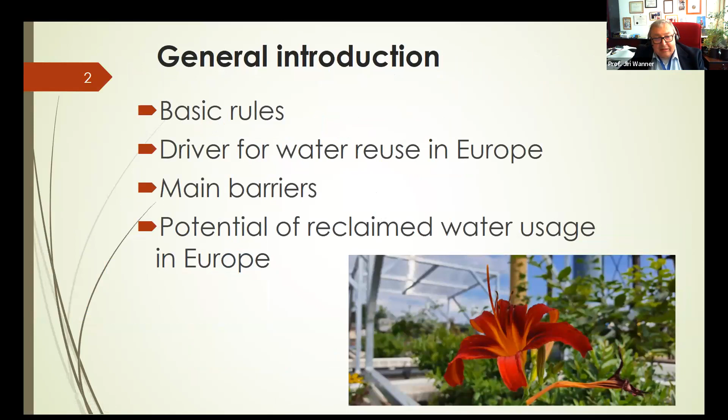My presentation is divided into two parts. In the first part, I will give you some general introduction about water reuse in Europe, the conditions and barriers, etc. In the second part, we will speak in more detail about the legal regulations in the EU. So water reuse can be ruled by two basic principles.

We are preparing the reclaimed water with certain quality, tailored according to the purpose. In all cases, the water reuse project must be safe for human health and for the environment. This is a very important condition, otherwise the idea of water reuse could be very quickly spoiled.

To fulfill these basic rules, the reclaimed water must meet some quality requirements. To have standardized quality requirements, we need joint standards. In the EU countries, we can see three different types. We have some countries which already have their own national standards for reclaimed water quality.

Those countries are especially from the Mediterranean area. Then, since today, we will be using the EU regulation number 741 from 2020. And then we have a very important set of ISO technical standards about reclaimed water quality.

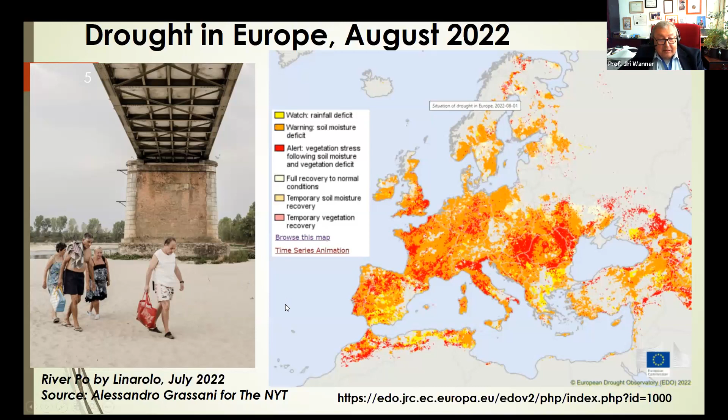Of course, on the other hand, there are some barriers for water reuse. Concerning the European Union, the main barriers are connected with low experience with water reuse in most EU countries, because not all EU countries were using, or are already using, reclaimed water, and they are now learning this new water resource, how to use it.

With this is connected the lack of experience also in identifying and optimizing the appropriate treatment technology, and unfortunately also the economy of the process. So we still have to learn how to develop very efficient business models for water reuse schemes.

All these barriers are connected with three major factors: the safety of reused water, which must always be guaranteed; the economy, which must be more beneficial and suitable than the use of tap water; and finally, not all people in the European Union are still accepting the use of reclaimed water instead of drinking water.

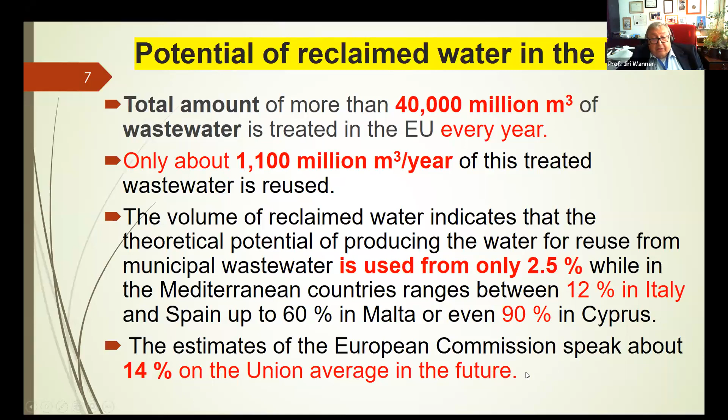The estimates of the European Commission are that we can reach at least 14% on the European average by applying this regulation. Water reuse must meet certain conditions, and these conditions are defined in the legislation.

I will mention in this part of the presentation how the regulation, which is today starting to be applied, was created, and we will mention also some auxiliary documents which were published by the EU, and finally we will discuss some possible reasons for the fact that some of the EU countries didn't accept the regulation into the national water legislation.

So what was the way of the European Union to water reuse legislation? I think it started in 2012 with this material. The main purpose was to consider all the ways how to guarantee water resources in Europe. The Commission for the first time published the idea that water reuse can be accepted as a solution with lower environmental impact than other alternative water resources, and promised to prepare an EU-wide legal instrument to control this area.

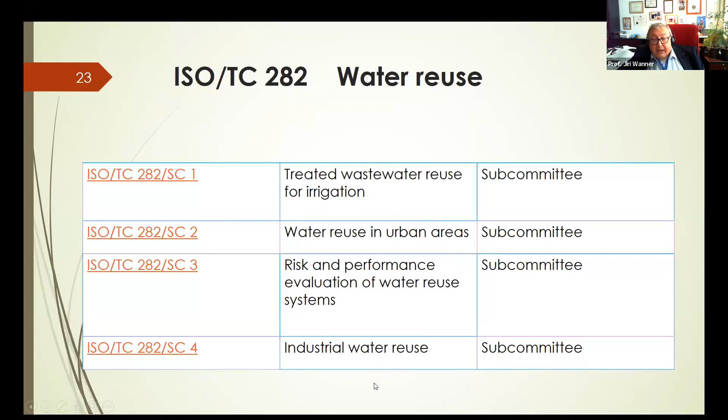We should also mention that the institution of water reuse has got support from the new proposal of the revised Urban Wastewater Treatment Directive of the European Commission, because article 15, paragraph 1 of this proposal says that member states shall systematically promote reuse of treated wastewater from all urban wastewater treatment plants. So this is very important support from this new directive.

We are now on 26th of June, when regulation 741 can be applied, and the individual member states have 3 options. They could either accept the regulation, or refuse the use of the regulation, or decide about the application only in some areas of the country.

We still do not know the final outcome of this procedure, but from the map presented earlier this month at the meeting of EU water directors, we can see that the European Union, in relation to this regulation, has divided into about 2 halves. The western part of Europe mostly accepted or adopted the regulation into the national water law system, and the eastern part mostly refused to apply the regulation.

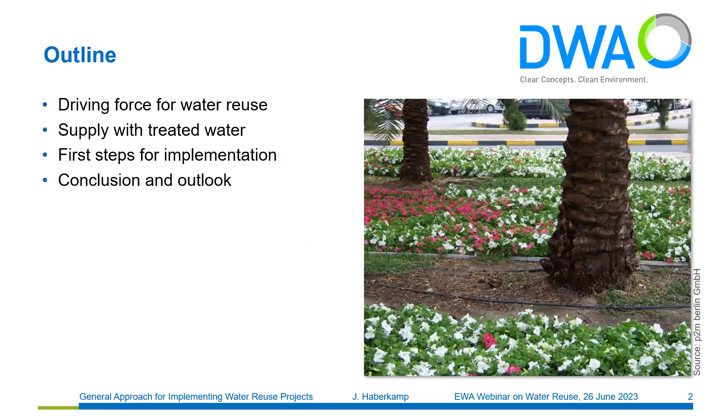As Professor Wanner already said, water reuse will not solve all our water problems, but water reuse or treated water may be a substitute for precious fresh water, so that the competition for freshwater resources may be reduced by water reuse.

In terms of the driving force, the lack of water, and you may also add the price of water, which is often connected to the lack of water, there are some general rules. First of all, the higher the lack of water, the higher is also the willingness of potential users to carry additional costs. So for instance, the farmers to carry costs for additional treatment and distribution of treated water. This, of course, has to consider the alternative. If the alternative is crop loss and therefore a high economic deficit, this has to be taken into account when drawing such a balance.

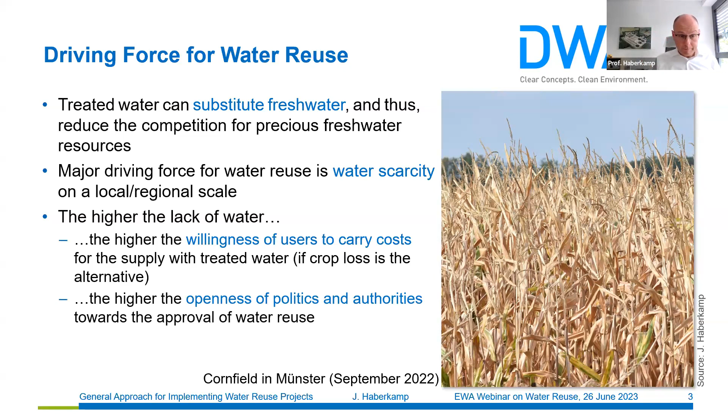The openness of politics and also public authorities increases with increasing lack of water. That's also an issue that we are just observing in Germany. And finally, public acceptance plays a very important role in terms of water reuse. We have already seen in a lot of regions all over the world that public acceptance strongly increases with increasing lack of water.

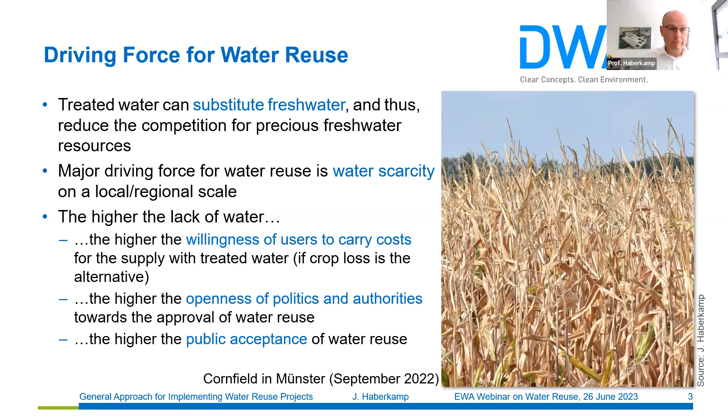In terms of the supply of the treated water, the distance between the wastewater treatment plant or water treatment plant on the one hand and the areas of use on the other hand are of crucial importance in terms of costs. On the one hand, capital costs have to be borne for the implementation of distribution networks and also maybe storage tanks, but storage tanks are not necessarily connected to the distance. On the other hand, the operational costs for pumping the treated water also increase with increasing distance from the treatment plant.

The catchment of a wastewater treatment plant has to be very carefully taken into account in terms of water reuse, because some dischargers, such as certain industries or larger hospitals, may discharge wastewater containing increased concentrations of, for instance, organic micropollutants or heavy metals. These water constituents may require additional treatment in order to reduce the risk regarding the application of treated water, and this additional treatment, of course, also increases the costs, and may even make such a reuse project impossible.

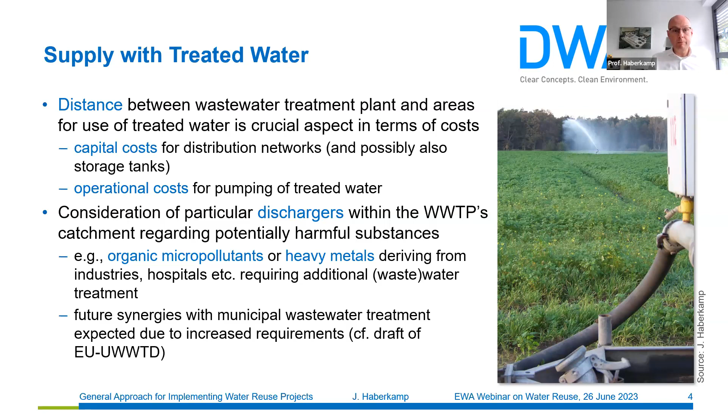So if on an individual site or on a local scale, water scarcity is a fact, and there is a certain demand or high demand of potential users, the very first step of the implementation is the analysis of the entire water reuse scheme, the entire system. You have to start with the catchment of the wastewater treatment plant, and you have to have a very close look at the existing wastewater treatment process. Together, the quality of the raw wastewater and the existing wastewater treatment process is decisive in terms of the current quality of the secondary effluent.

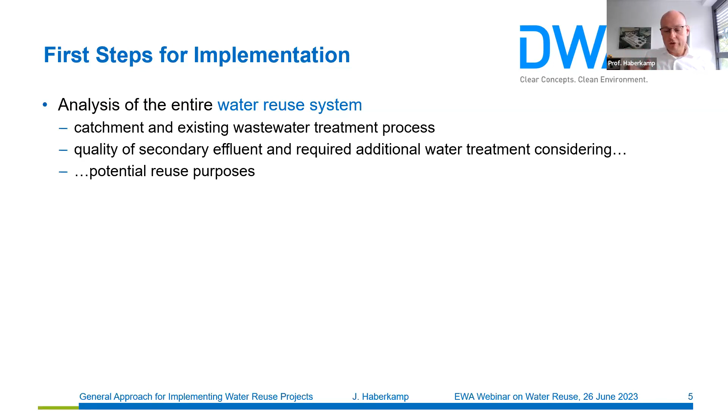And of course, additional water treatment is required. The degree to which the secondary effluent has to be further treated depends on the potential reuse purposes. As Professor Wanner already said, there are four quality classes which are connected to the purpose of reuse.

And all this is overseen by the competent authority, the authority that is responsible for giving the permit, which also has to be included in the process from a very early point.

Then, as Professor Wanner already said, the preparation of a risk management plan is obligatory regarding the EU regulation. This risk management plan has to be prepared under the responsibility of the operator of the water reclamation facility, with the involvement of all stakeholders involved.

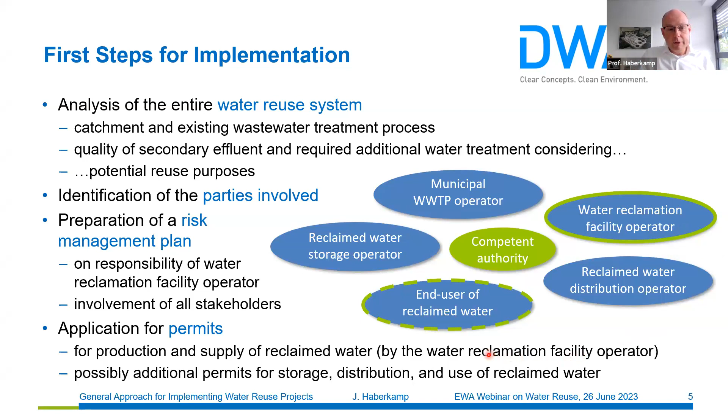There is at least one permit that has to be applied for: the permit for the production of reclaimed water, which has to be applied for by the operator of the water reclamation facility. There may be additional permits, for instance for storage, distribution, and use of the reclaimed water. For instance, in Germany, it's quite probable that a further permit will be required, to be applied for by the end user of the reclaimed water.

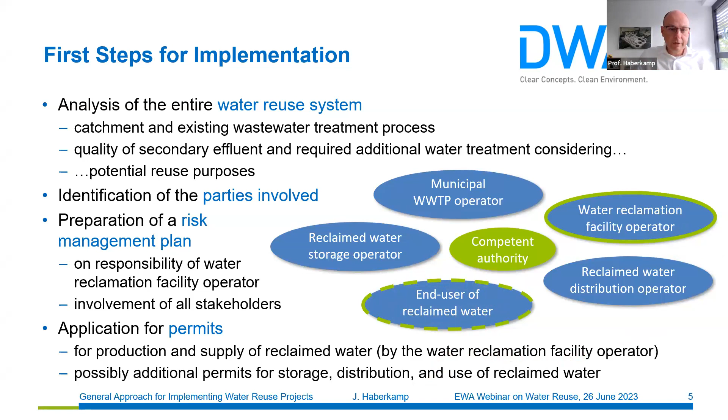So let me just briefly conclude. I guess we all agree now that climate change is very likely to increase droughts, as we see now in Central Europe. And the requirements for water reuse are not trivial at all, but with good cause. Water reuse is connected with certain risks, and it is very important to address these risks and minimize them.

These requirements are accomplishable if the driving force is strong enough and if the will of all parties involved to implement such a reuse system is high enough.

The preparation of a risk management plan is quite a new challenge in the water sector, but it's not only a specific issue regarding water reuse. It is now also required in drinking water supply, and it will be required in the future in wastewater treatment and discharge. As I said, there will be some synergies with the future European wastewater treatment directive.

And therefore, I'm quite sure that water reuse will contribute to the conservation of precious freshwater resources, which can then be used for other purposes, so that reusing treated effluent or treated water for brewing beer may be just a funny exception in the future. So with this, I thank you for your attention, and I give back to Jiří.

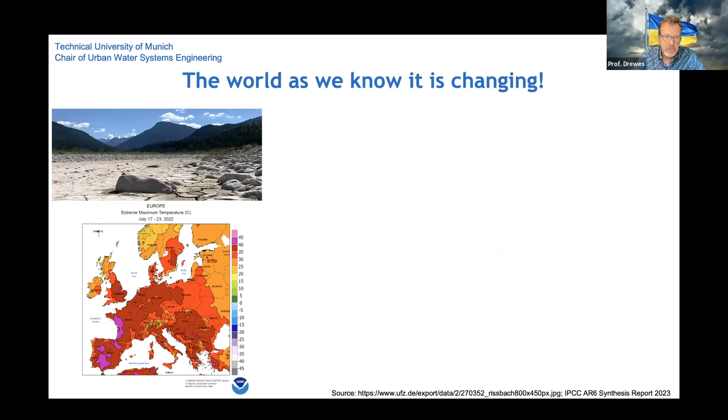So do we really need it? I think it's more a question of awareness and willingness to adopt. I want to briefly mention, as the previous speakers already did, when you reflect on the last 5 years, 4 of them, 2018, 19, 2020, and 2022, already had major impacts with respect to extended droughts in Southern Europe, but also in Central Europe. So things are changing dramatically, and the world as we know it is changing, with significant implications.

Even if we meet the Paris Agreement on a global scale with 1.5 degrees temperature change, or not to exceed this 1.5 goal, people who are born today or are young professionals will live in a very different world in the future, not to speak of if we don't meet this target.

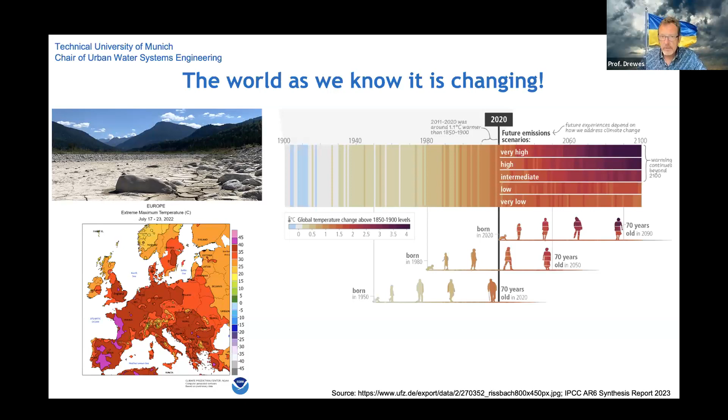So the extreme events we're experiencing already will come with significant challenges to the water sector. This primarily results in declining supplies, a very different precipitation pattern, and extreme events, too much and too little over extended time periods. And with that comes growing uncertainty for planning and operation, which calls for new, more flexible approaches to cope with these challenges.

And of course, also an increasing demand in sectors that have not really utilized, for instance, water for irrigation an awful lot. That certainly is true for Central Europe, when we think of the agricultural sector, but also for urban green, as mentioned before, or vegetation in general will need more water to survive.

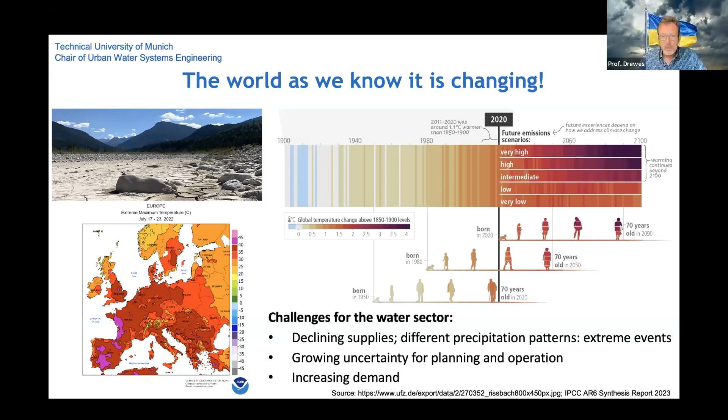So there's certainly a need to diversify supply options, recognizing the increasing demand in agriculture, urban landscape irrigation, securing public water supply, but also maintaining ecological base flows. We can ask the question, do we always need to deliver drinking water quality for these purposes? Or can we go to a more tailored approach that would meet a water quality appropriate for the intended use? And that brings us to water reuse.

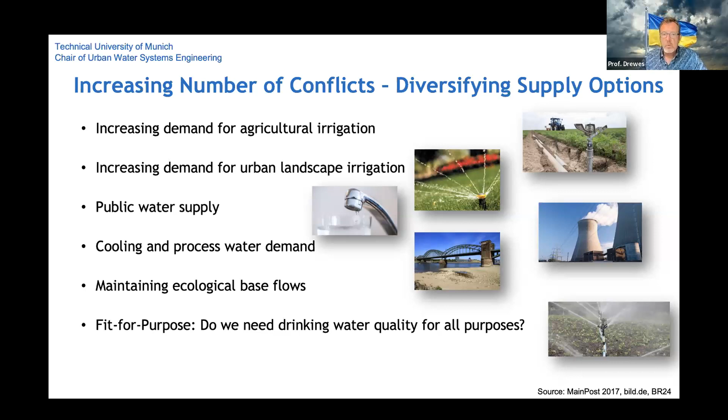So indeed, I do see a tremendous opportunity to at least provide the option for water reuse, even in countries that have not experienced it in the past. The map Professor Wanner showed is interesting, because even countries who opted out at the moment will fall into this category and have to cope with these challenges. Of course, it's not intended that we do water reuse nationwide—it's always a local issue, a local shortage in many countries where water reuse could play a role.

Coming to the next question: it's too complicated. Well, it's mainly a question of implementing risk management and providing proper guidance to do so. As mentioned before, when you look at the regulations, there are two legs essentially formulated. One is the set of requirements that need to be met at the treatment plant with respect to certain water quality requirements. But the second leg is the risk management framework.

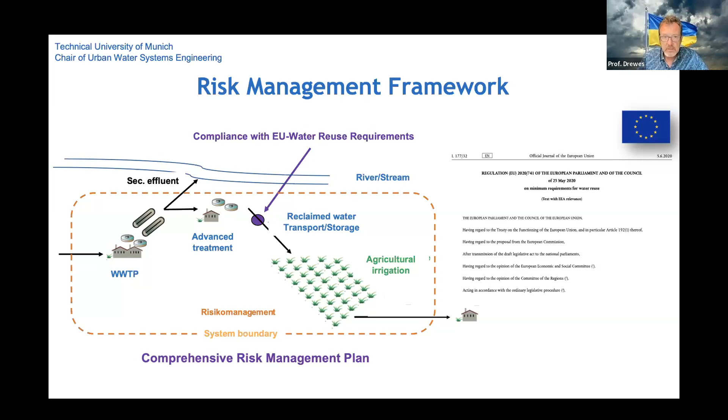We need to think about transport and storage, the conveyance part, and the type of application. And all actors involved in this system need to be on the table and need to be considered. That's the basis for how we want to do the risk management plan.

There is a lot of guidance, even new guidance forthcoming from the Commission, technical specification guidance on how to impose and execute risk management. But mainly it has three core elements: the definition of public health goals, the implementation of the risk management plan, and the compliance element. And this is a continuum.

So you're not really done after going through this once. You have to review it on a regular basis. Maybe you have new information, or a change in your practice of reuse, and that needs to be adopted in the risk management plan. So it's a circle where you go back and reflect on your practice, on new requirements, and then see whether you need to adopt.

This risk management framework is widely used in sensitive areas, like the aerospace industry and the food industry, and indeed we have it now implemented also in the new drinking water directive. When you look at Articles 7 to 10, they essentially require very formalized, transparent risk management. So regulators and operators need to adopt to these new requirements anyway.

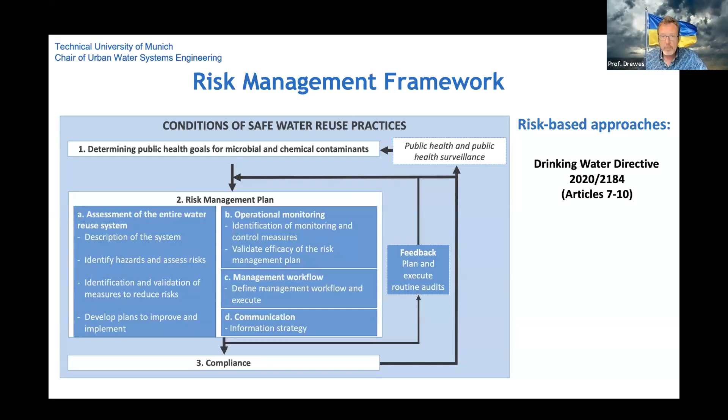So it's a new sort of culture in how we operate water systems. The same is true for the water reuse regulations, which apply as of today, but also are embedded in Article 18 of the revised or proposed revision of the Urban Wastewater Treatment Directive. So it's a new set of goals. In my opinion, it's a transparent process, very appropriate for this type of practice to properly manage risk, and we just need to adopt to it.

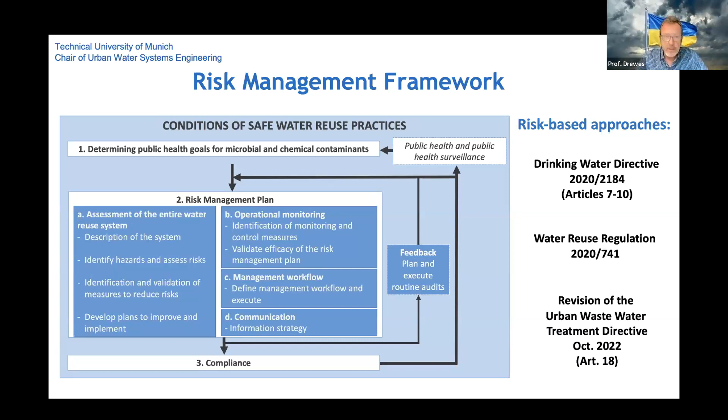The last question: is it safe? So it's a question of how do we ensure safety for human and environmental health? When you look at the requirements, the minimum requirements of the EU, they are specified with respect to certain water quality parameters.

It's pretty much adopted from internationally established standards for different types of reuse practices. Category A even allows food crop irrigation for crops eaten raw. When you look at the ISO standards, they essentially look very similar. When you look at the WHO guidelines, very similar approaches, and the same is true for the log removal validation criteria.

So what are the total log removal values that have to be accomplished by a treatment train specified for category A in the EU regulation? That's based on a risk-based approach where you essentially define a tolerable risk in society, which is accepted by a country or by a society. On this basis, considering the raw water concentration of pathogens, you can derive these log removal values. So it's very much in line with internationally established guidance documents and standards, and proven by a lot of experience in countries practicing water reuse for a long time. So this can be considered a safe practice.

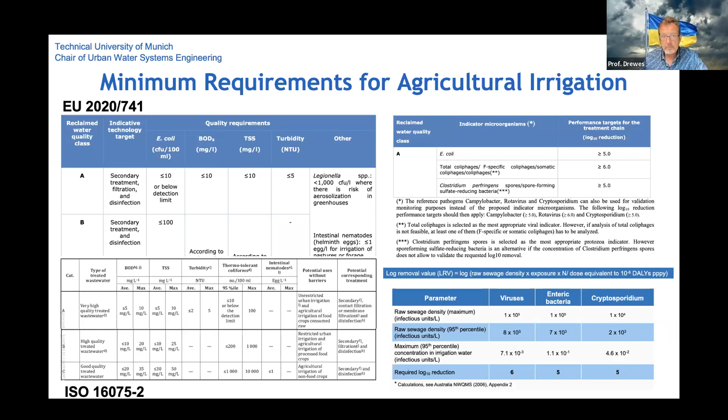Of course, you need to assure it on a day-to-day basis, 24/7, depending on the type of reuse you're doing, and for that additional guidance is needed. Very important, in my opinion, particularly for countries with very little or no experience with water reuse, is to show and demonstrate that this indeed is a safe practice by establishing demonstration scale projects where you can learn from their experience. You can look at this on the ground, talk to operators, talk to appliers or users of this water, and this goes a long way.

So they can function as a multiplier in implementation, but it's also very important to maybe even adjust. As we've just learned in the overview, countries have the option to impose more stringent requirements, and that might be justified depending on the setting. So looking at this is very important.

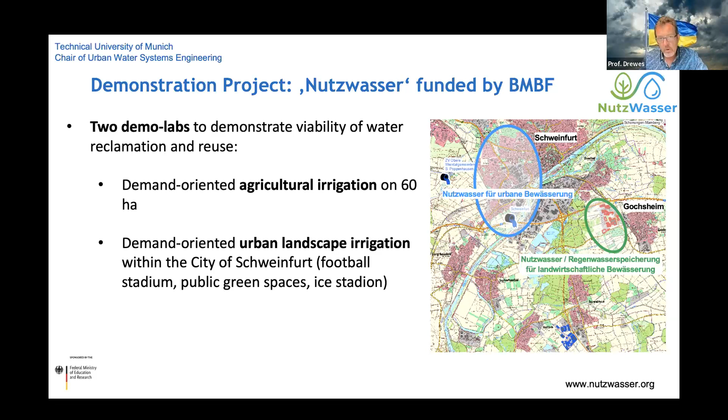We are also conducting a demonstration scale water reuse project in northern Bavaria. We're looking at agricultural irrigation for crops eaten raw, as well as urban landscape irrigation. This is sort of the setup we have there. I can give you more details later or after the seminar.

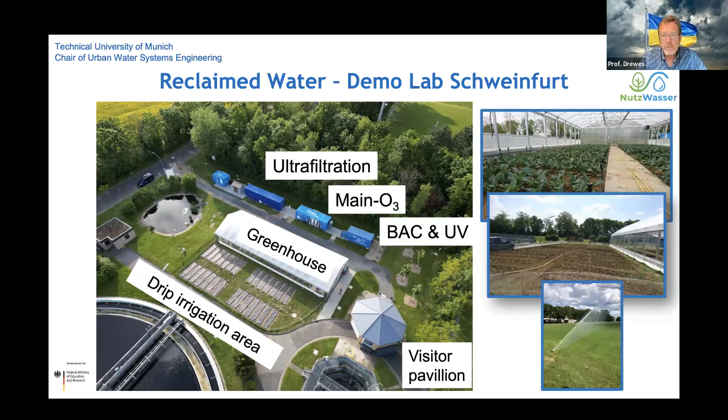We're looking at a multi-barrier treatment train, but we're also comparing this more advanced train to the standard train of the EU regulation, which consists of secondary effluent followed by filtration and disinfection. We're applying these different water types in a greenhouse on crops eaten raw, but also in an open area with drip irrigation, as well as urban landscape irrigation. And depending on the site-specific conditions, we might also have to go beyond these more hygienic requirements when we think of water quality parameters with respect to trace organic chemicals or antibiotic resistance.

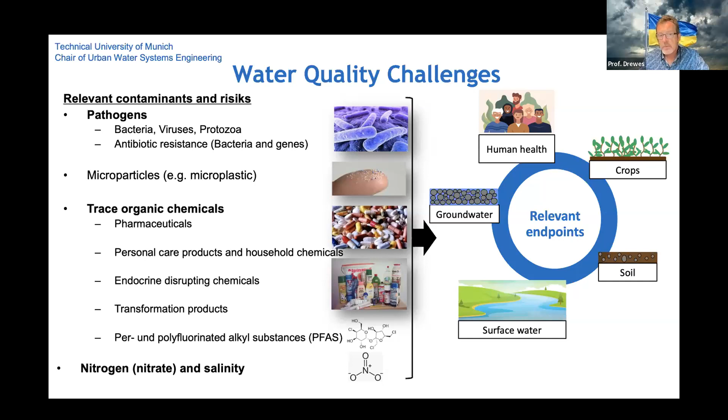You need to keep that in mind, but make an assessment depending on the relevant endpoint. Is there really a risk for groundwater? Is there a risk for human health? Depending on the practice, and that's not always the case. In particular, when you do irrigation following the good agronomic rate approach, or a demand-oriented irrigation, it's very unlikely that reclaimed water would actually hit the groundwater, or that people are exposed.

That's all I have, so I'm happy to discuss this further with you, and just wanted to give you some additional input here. Thank you.

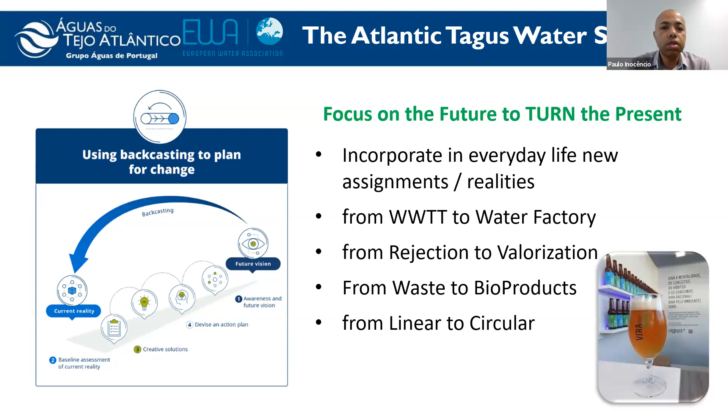For that purpose, it's crucial to make a proper baseline assessment of our current reality: what happens now, what are our problems and bottlenecks that we have to face, and therefore make it possible to achieve our goals. Upgrade the wastewater treatment plants to water factories. We want also to go from water rejection to valorization, from waste to bioproducts, and last but not least, from linear to circular economy. In this manner, we want to simplify, considering that in our interpretation wastewater is a raw material and main substance used to produce other things.

What are these other things that we produce and want to increase production of in the future? I'm talking about reused water, with our reused water brand Água Mais. We are talking also about biosludge, biosludge as fertilizer for agricultural application, our brand Biosludge Plus, and bioenergy, which aims at energy production through digestion and co-digestion, biogas production, and electric valorization. Besides this cogeneration production, we also produce electricity using solar panels, and are increasing this production as time goes by.

But with new realities, facing climate change and other related issues, these new realities demand more than profitability and return analysis, not only financial analysis. We must also think about sustainability and preservation. It's essential to remember that water is a scarce resource and is present in everything. Without water, there is no life.

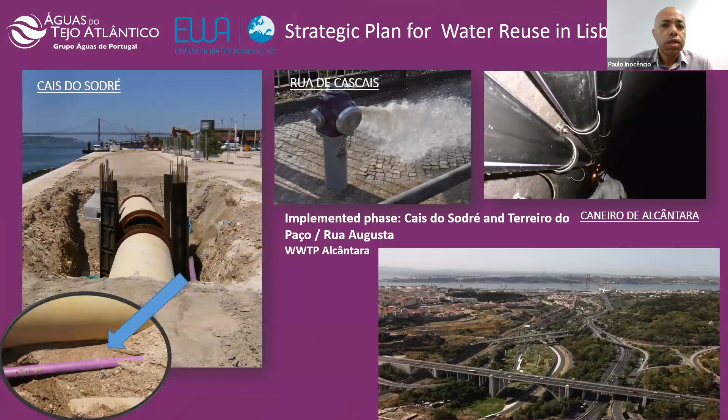The strategic plan of water reuse in Lisboa, also called Água Mais, has many phases. The first one is already carried out: the reuse network from the wastewater treatment plant at Alcântara, where I worked, to Cais do Sodré has been implemented, making it possible to wash the streets of this downtown area of Lisbon. Part of this reuse network is inside a main sewer tunnel, Caneiro de Alcântara, as depicted on the right.

Alcântara's plant, the biggest one in Lisbon, with an average treated flow of 140,000 cubic meters per day, is fully confined by a green roof with a total area of 3 acres, irrigated with treated and reused water from this plant. This green roof is essential for thermal insulation of the building, rain retention, and landscape integration.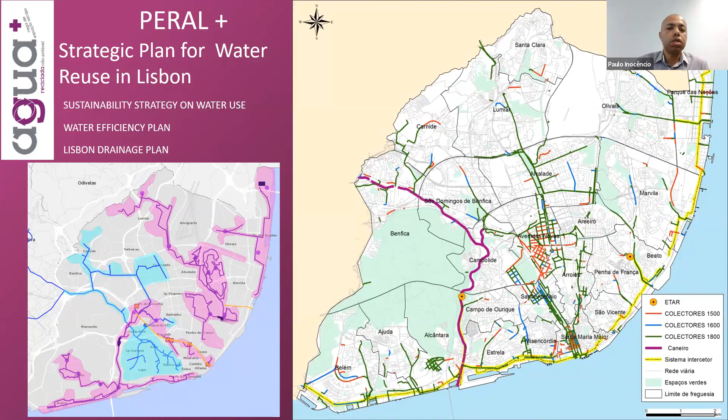In the picture on the left, in fuchsia, are depicted the network and green areas of Lisbon to be integrated with Água Mais. This plan also includes a green corridor with reused water lines and a lake near the Alcântara plant, as depicted in this slide.

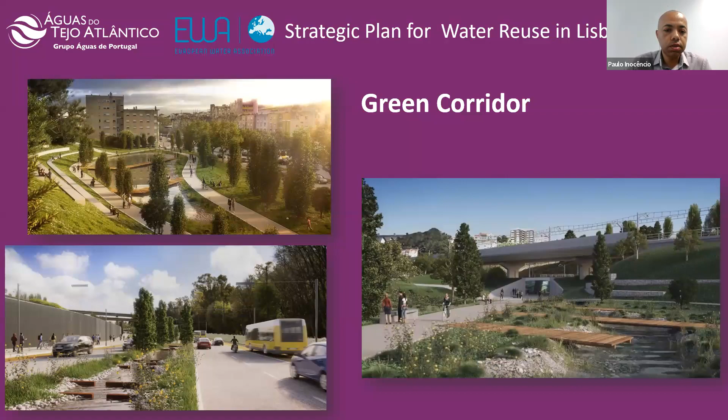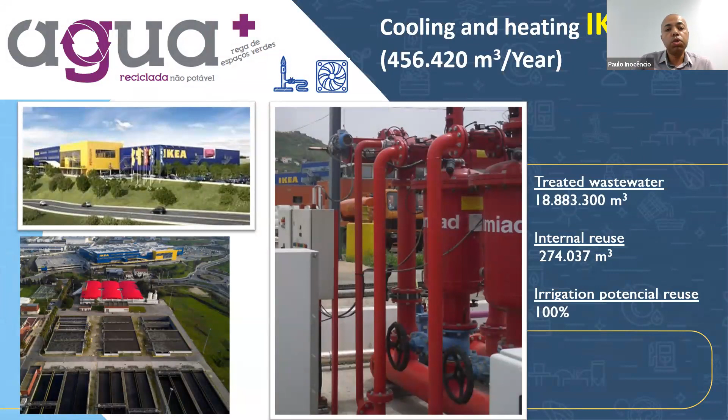Águas do Tejo Atlântico has a contract for reused water supply with IKEA for the purposes of acclimatization of the store in Loures, already in force since June 2011, with an average annual supply of 500,000 cubic meters per year, with positive results for energy and environmental efficiency. We are talking about heating and cooling, depending if we are in winter or summer.

This shows that today there is technology to transform dirty water into clean water, and I recall examples from Singapore, Namibia, California, South Spain like Murcia, and Israel. We made a craft beer in partnership with the brewer Letra and the company Moinhos. It's a very good beer, 100% secure, and I can say that because I drank a lot of it in the past. It was created to change mindsets and show that reused water is available, with Água Mais producing different qualities and costs for different purposes.

And thank you for this presentation. Any doubts, I'm available for them.

Okay, Paulo, thank you very much for your interesting presentation and for the recommendation of which kind of beer we should try next time visiting Lisbon. For sure, we have beer available for you here.